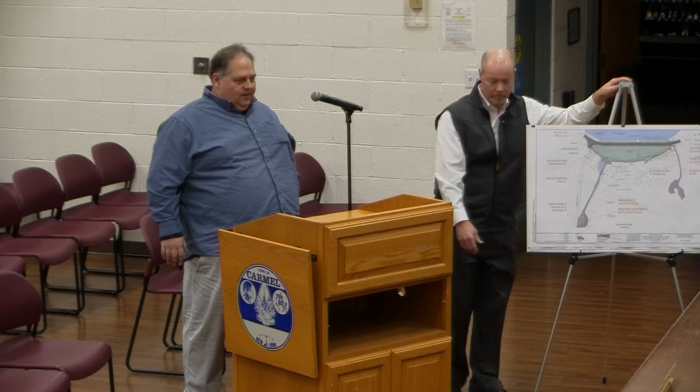Okay, next up is New York City DEP West Branch Auxiliary Dam, 34 Drewville Road. Site plan referral, planning board referral. Please state your names and who you're here to represent.

Sure, my name's Paul Costa, I'm with New York City's Bureau of Engineering, Design, and Construction. This is Eric Leclerc, I'm with consulting firm CDM Smith, representing the applicant. And that's Linda Singh. We actually work out of Eastview, we have an office up here, but our headquarters is Rye Brook.

If I could real quick, this project, I'm not sure how familiar you are with it, but for the last couple of years we've actually been talking to the town engineer and the town code enforcer about this project, in terms of the goals, and then working out details like traffic control, coordination with other offices in the town, because there are both tree removals and wetlands on the site.

So I'm going to turn it over to Eric in a second, but just to give you an idea of what the whole project's about: there's one area up at the roadway, at the top of the dam, where the roadway drainage and erosion has created an instability, because it's built up and too steep. That little local area is unstable with erosion. It's not having any effect on the dam or the stability of the dam or the roadway. It's very localized, and basically we're adding more material to the front of the dam as a first phase, then coming back the second year to rebuild the roadway.

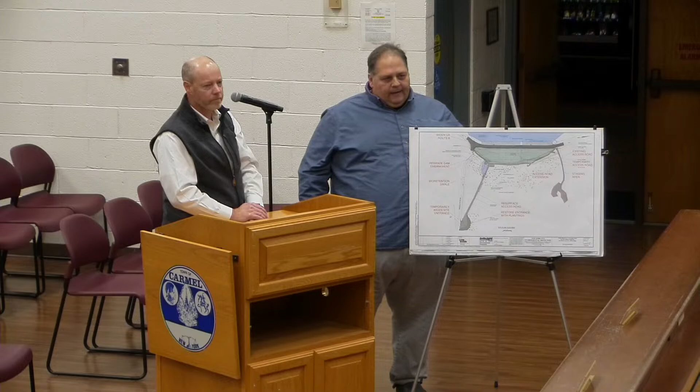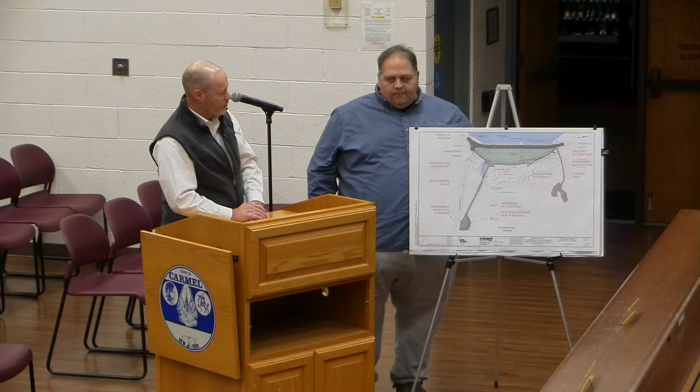We're going to widen that slightly as part of the project. The portion in green there is the downstream face of the dam, where Paul mentioned we're going to be adding fill to stabilize that local area. Was it an earthen dam at the top? It's an earthen dam, yes, with a concrete core, concrete rubble core embedded within it.

In addition to that, we're doing some drainage improvements to collect seepage that comes through the earthen portion of the dam, and drain that away properly. Also, as Paul mentioned, there are issues with roadway drainage washing over the crest at the top of the dam, causing some erosion. We're going to collect that and put it down into a bioretention swale at the base of the slope before it works its way off the site.

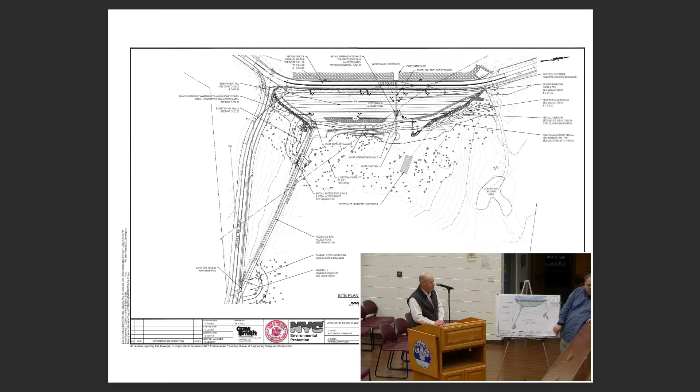Did you guys start any work over there recently? I've seen clearing done over there or something. Was there any work done? If it was clearing, it could have been done by operations for their own reasons, but nothing as part of a capital project yet.

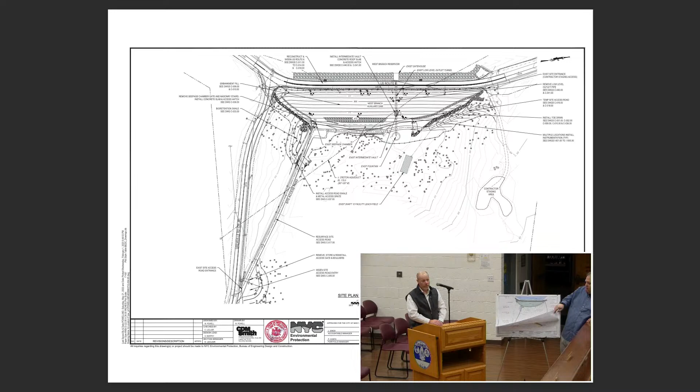Next, a little more detail will show you right here. Here's the top of the roadway, here's that - the top's going to be really built up here. And here's the material we're going to be adding to the base of the dam, rolling all the way up to make improvements up here. This will be done in the first year. Second year, we're coming in and redoing the whole thing.

Was it a 2-year job? 2-year project? About 2 years, 2.5 years total, but one full season doing the dam. Is this one contract or multiple contracts? One contract - he's coming in for 2.5 years total.

We'll show you the other part of the site - we're putting a signal up there. The traffic control is probably the biggest challenge here.

Are you going to be turning that into a single lane during construction? I don't know if it shows it here, but the intent, as Paul mentioned, involves some coordination with Rich Franzetti and the planning board. It was recommended that we do the roadway construction at night, so the bulk of that work will happen at night. At night there'll be alternating one-way traffic controlled by signals at either end of the dam. During the day it'll be back open, free flow, sometimes on a gravel surface.

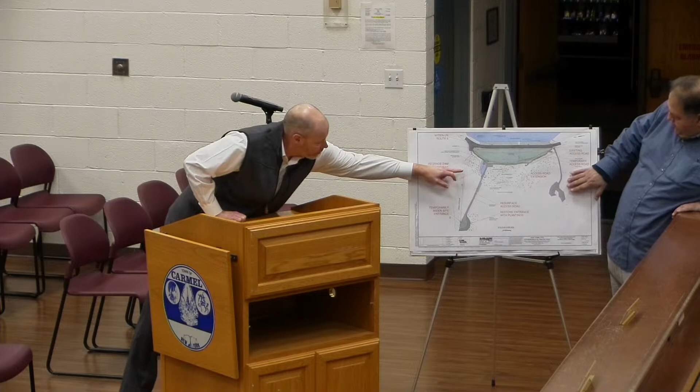You're not using armor rock or anything, just regular fill? It's basically regular fill on the entire slope. The only place we'll have larger stone, riprap, is the drainage channel, the swale along one side. So it's new, newly constructed? That is a new one - it's new, so that's over here in this corner. That's a new feature we're adding because of the drainage we're collecting from the roadway, to handle that volume.

Within the site, there are 3 distinct wetlands. The larger one you see is at the base of the dam. This smaller wetland was created basically at the toe of the slope between a temporary access road, impounding the water there, and it became a wetland area. That one is going to be essentially removed.